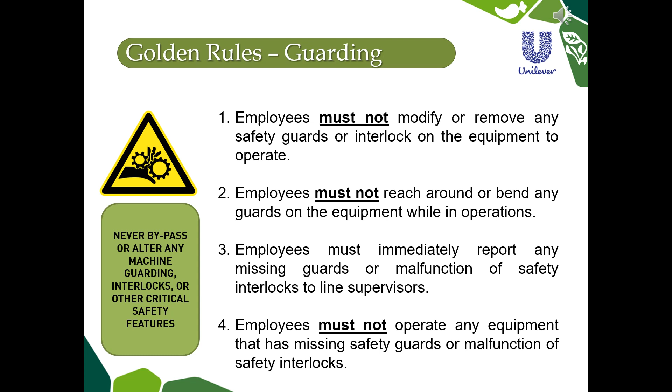So why do we go to all this trouble? Well, injuries, amputations, even fatalities happen every year resulting from the improper use of machine guards or improper procedures following machine guarding. We want to make sure that you protect yourself from all of these injuries, amputations, and other hazards by following the procedures and making sure we have effective machine guarding in place.

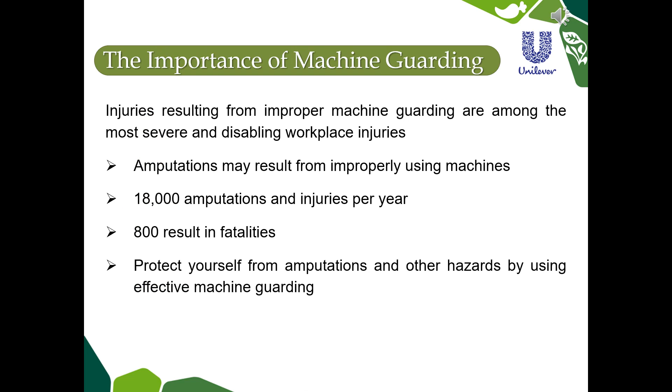Continuing with the importance of machine guarding, machine-related injuries may include crushed hands and arms, severed fingers and limbs, lacerations, and abrasions. These can all happen from the hazards created with machine parts that move. There can be pinch points, rotating parts, reciprocating parts - parts that move back and forth - flying chips, and even sparks. There's a lot of hazards associated with this, which is exactly why we put so much time and effort into guarding our machinery correctly.

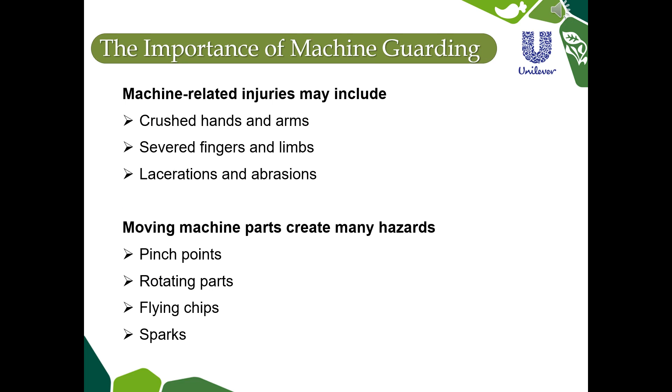Machine guards themselves are barriers which prevent access to dangerous areas. They act as physical barriers to keep people's hands, fingers, arms, and legs out of dangerous areas, and they enclose and prevent employee contact. So machine guards are essential for protecting you from preventable injuries.

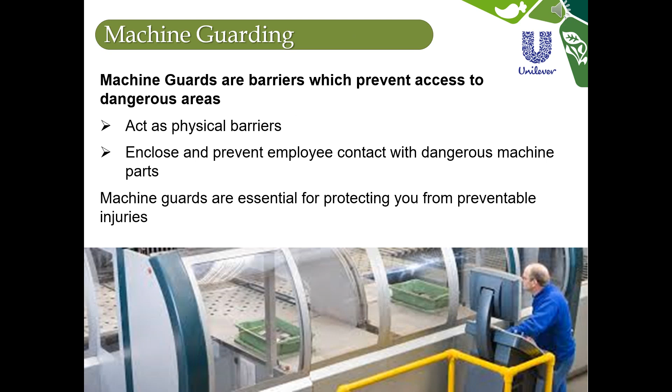All machines consist of three areas. The first is the point of operation - basically where the work is being performed on the material, where the cutting, shaping, boring, sealing, or trimming would be done. Then there's a power transmission device, which is what moves things - flywheels, pulleys, couplings, spindles, chains, conveyors. And then there are other moving parts, which move while the machine is turned on, consisting of parts that move back and forth, spin, or go up and down.

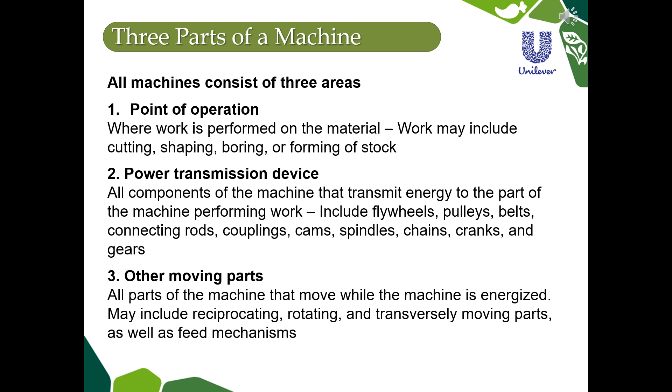The hazardous mechanical motions that can get you hurt are rotating motions - pieces of equipment or machinery turning in a circle, usually flywheels or shaft ends. There can be spindles, couplers, cams - these kinds of things can grip your clothing or force your body part into a dangerous location. There's reciprocating motion, which means it moves back and forth or up and down. It can move to the right and you think you're okay, you put your hand in there, and all of a sudden it stops and switches direction and moves back to the left, and that's how it can entrap you. There's also transverse motion, which is motion in a straight continuous line.

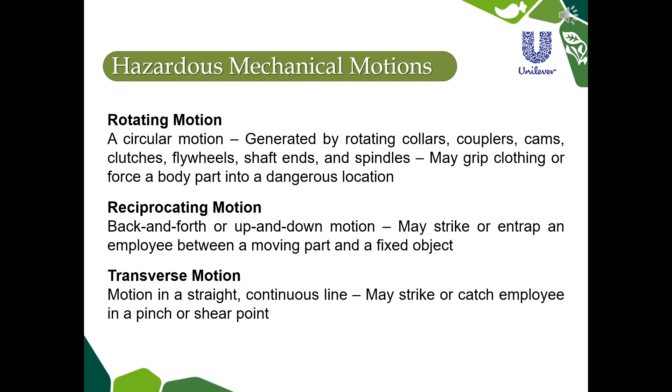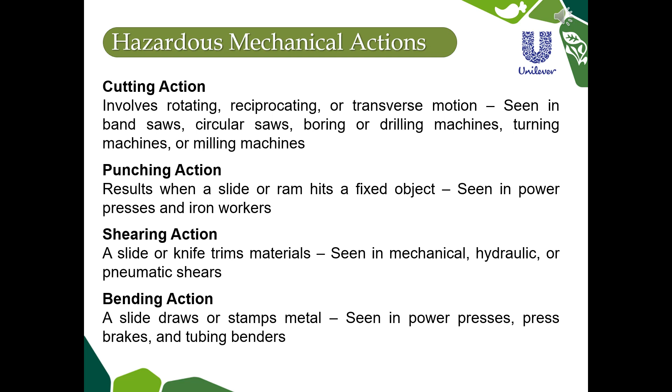Let's talk about hazardous mechanical actions. There's a cutting action, usually involving rotating or reciprocating motion - you see this in band saws, circular saws, drilling machines, lathes, and things like that. There's a punching action, which results when something hits a fixed object, either to punch a hole in it or sometimes to help form it. There's a shearing action, where a slide or a knife trims the material. And there's a bending action, which is when something stamps corners, edges, or some type of stamp into the material.

So what causes machine incidents? Sometimes an employee will reach in to clear equipment. Sometimes they'll reach around a guard or take a guard off and reach in. Not following proper lockout procedures can get someone hurt. Sometimes unauthorized people are doing maintenance on or using the machine without being trained properly to do it. And then there are missing or loose machine guards - it's very important that if you find a loose or missing machine guard, you notify your supervisor immediately.

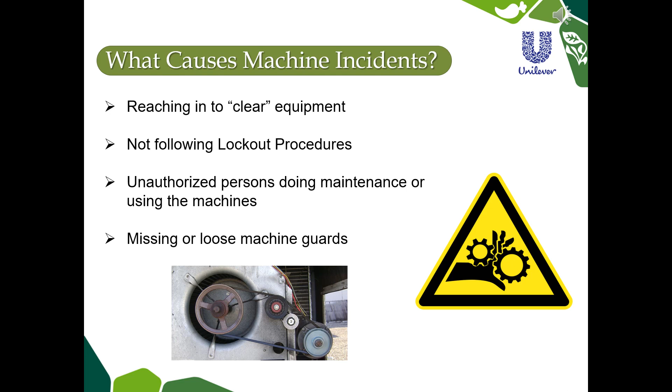So you might be asking yourself, how can I get hurt? Well, when we're talking about machine guarding, we normally refer to nip and pinch points. These are points where rotating or reciprocating motions of machines can pull your body part, your finger, or your clothing into that area and cause damage.

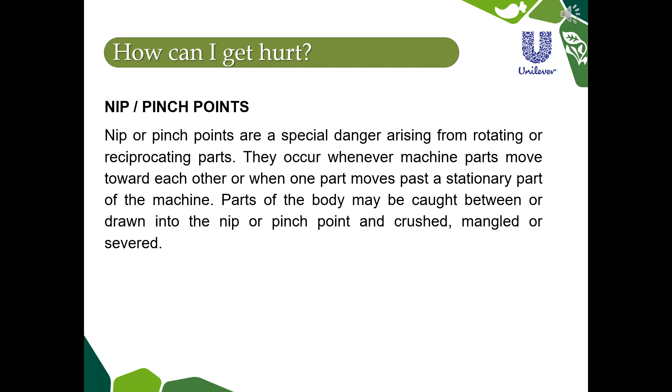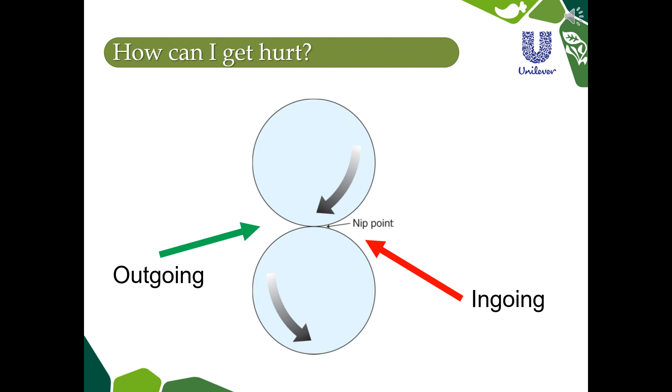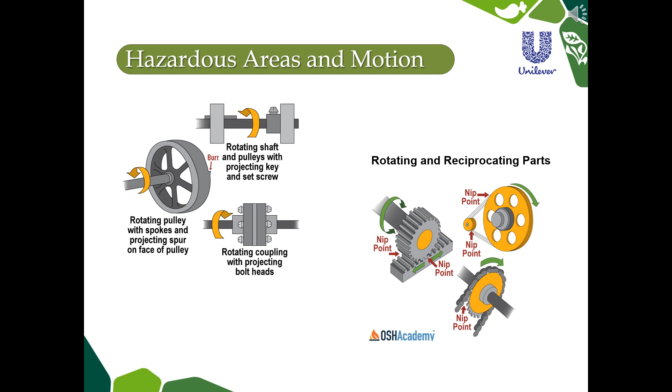Hazardous areas and hazardous motions must be guarded with machine guarding to keep everyone safe and away from these dangerous areas. All right, we need to discuss machine guard requirements. All machine guards must prevent contact. You cannot get your hands, arm, any body part, any part of your clothing into an area that, as we saw earlier, can grab you and pull you in. Guards have to be secure. They have to be bolted on. They cannot be easily removed.

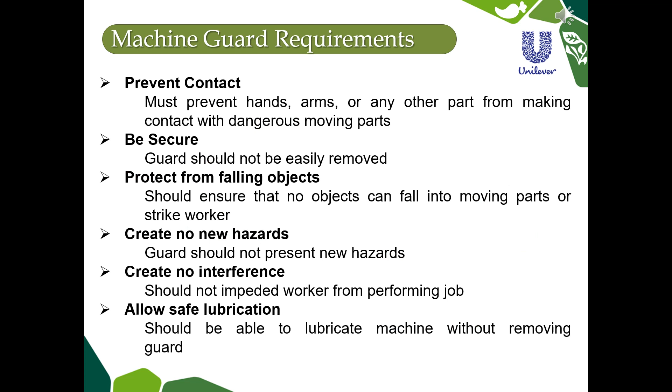They have to protect from falling objects. If you can imagine something spinning at 800 RPMs and a tool falls down on top of that, it could get shot clear across the plant and strike someone and hurt them. They cannot create any new hazards. If we put a guard up and every time you get close to it, it cuts you or burns you, then it doesn't make any sense. Cannot create any interference. You have to be able to perform your job, and we have to put guards up so that we can still safely lubricate machinery without removing the guards.

Okay, there are 4 types of machine guards. The first one we'll talk about is a fixed guard. It's a permanent part of the machine. It may be constructed of sheet metal, screen, some type of wire, bars, something that will provide a barrier, once again, to keep anybody's hands or fingers from getting in a hazardous area, but it still has to allow for the material to pass through so that the product can be made.

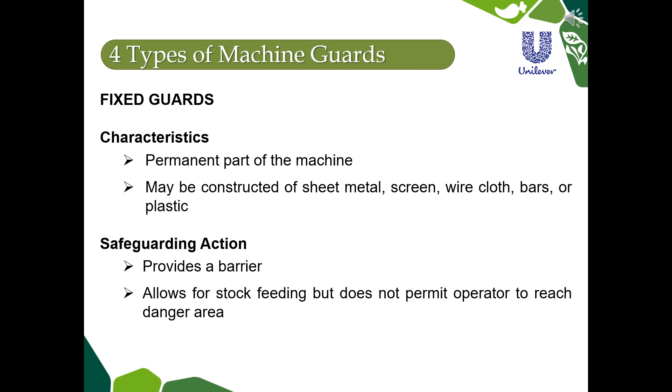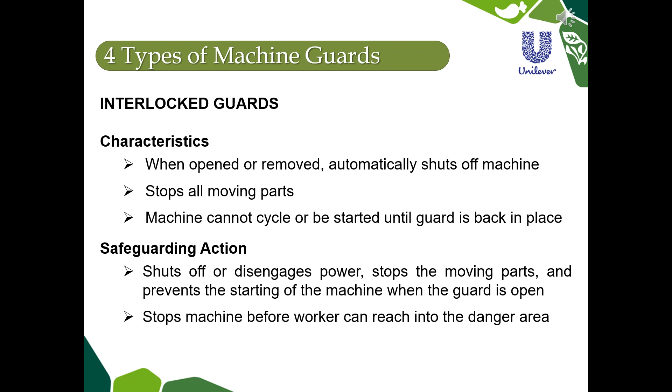The next type of machine guards are interlocked guards. We have a bunch of these in our plant. Basically, when they are opened or removed, it automatically shuts off that part of the machinery. It stops all moving parts, and the machine cannot be started again until the guard is put back into place and the reset button pushed. Once again, the safeguarding action for this is it shuts off or disengages the power and it stops all moving parts while the guard door is open. All right. This allows you to quickly reach into a dangerous or hazardous area, clear a jam, make a real quick minor adjustment.

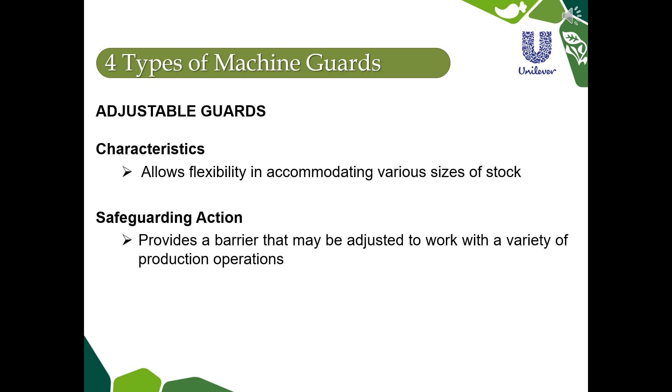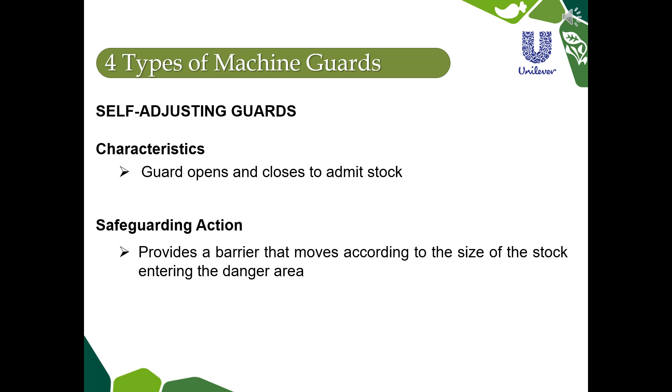There are also adjustable guards. Adjustable guards allow flexibility in accommodating different sizes of material to go through, and the safeguarding action provides a barrier that can be adjusted to work with a variety of different types of operations and different sizes of stock. The fourth type of machine guard is a self-adjusting guard. That guard opens and closes as the stock is pushed through there. It also provides a barrier that moves according to the size of the stock entering the danger area, so it can accommodate many different sizes of material going through it.

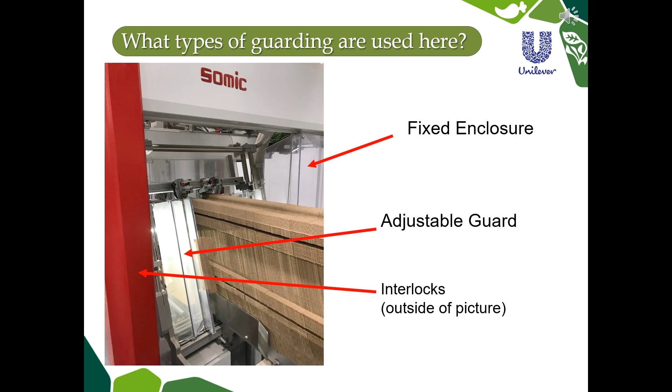All right, guys, we're almost done. A quick summary is never modify, remove, or reach around any safety guard or interlock. Never operate any equipment or machinery that has missing or loose safety guards or malfunctioning safety interlocks. Make sure you always report any missing safeguards or any malfunction of interlocks to your supervisor. If you're ever uncertain about a guard or if something seems unsafe, shut the equipment down and report it immediately. We want to make sure that you go home with the same number of fingers that you showed up with, okay? That's it. It's quiz time.

Once again, please make sure that you do your very best on the quiz. They are being graded now. We want to make sure that you guys are getting this information and you're understanding it so that we can keep you safe.